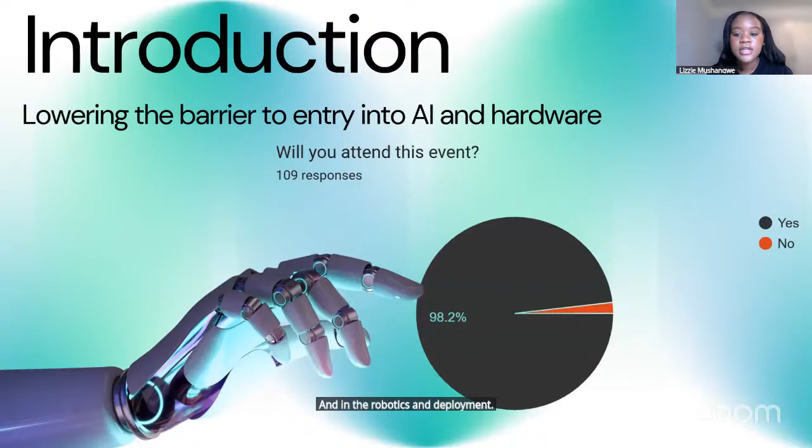So AI today is very software heavy, largely driven by benchmarking, improving metrics, and then publishing results. What's missing is that deployment intuition. In robotics and deployment, that's where friction appears immediately.

So the lab is an intersection of communities. We have OXRAM, which is Oxford Robotics and Additive Manufacturing Society, and OXAI, which is what I work with. And the first lesson we learned was to collaborate and share knowledge.

We have students who are strong in 3D printing and additive manufacturing, and we heavily drew from OXRAM's experience just to initially get running. So if you're a beginner, definitely lean into networks that already exist. OXRAM really helped us with prototyping and 3D printing, and OXAI is very software heavy.

We were strong in terms of machine learning, neural networks, and training models. So it was kind of an intellectual transfer between the two societies, and this enabled us to expedite the work we were doing.

A lot of the public asks, what is embodied AI? I think it's great to start on a level playing field. A lot of public conversations around robotics focus on humanoids or general intelligence, but that's not where the most successful systems are today.

In my opinion, the systems that work best are constrained systems - arms that work on smaller tasks, arms doing surgery, robotic dogs working in nuclear or defense areas, and drones. Mobile robots operating in structured environments aren't just what we focus on in the hardware lab, but this is what grabs everyone's attention when they think of robotics.

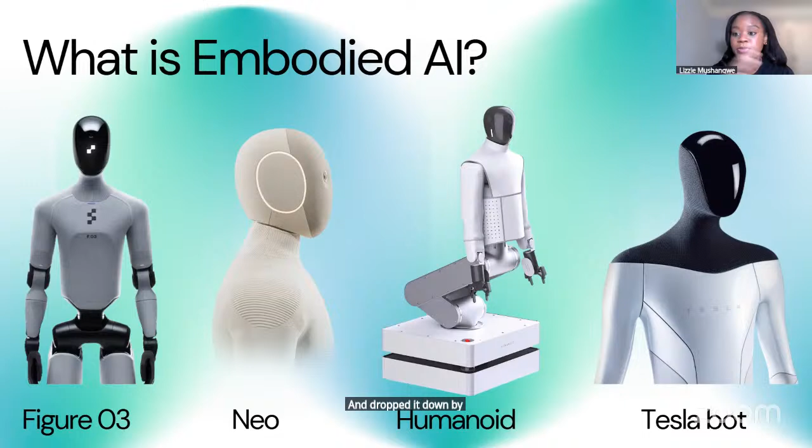Our hello world, what we called it, was to have a robot that picked something up and dropped it down by itself. From there, we could springboard into something more interesting.

To achieve this, we relied heavily on open source infrastructure, particularly LeRobot. I'm not sure if you've heard about it, but it's an open source GitHub and Hugging Face repo where you can assemble, plug and play, and build a robot by yourself - it's like adult Lego. This was lesson 3 we learned, and it was the inflection point or catalyst that helped us really expedite our progress. The key advantage was the pipeline was streamlined, and the GitHub repo just enabled us to get it running.

So all of our decisions were made to force everyone through the full loop - everyone learned how to assemble, calibrate, collect data, train, deploy, and debug. Once you go through this loop, your understanding of AI shifts - you realize many model problems are more physical problems, and many data issues are just calibration issues. This requires a lot of iterating and going back and forth. Once you go through this loop, your perspective of the difficulty of AI changes - this is what lowered our barrier to entry, just by going through this iteration procedure.

One of the most encouraging outcomes was how quickly students progressed. Over roughly 8 weeks, spread across 2 Oxford terms, students went from zero experience to assembling robotic arms, calibrating motors, collecting data, and training simple policies. It was heartening to see. The goal wasn't production-ready robots, but ingraining capability and know-how from beginner experience, getting to a stage where you could say, I know how to build a robot, I know how to train a model. Capability will scale faster than hype.

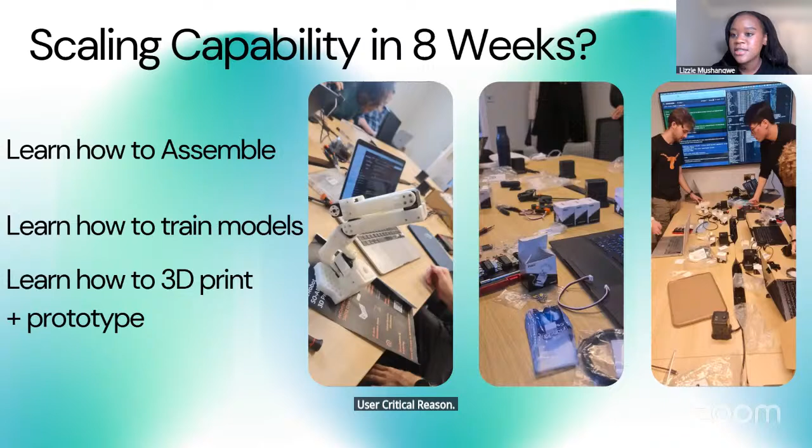Once people understand these constraints, they can learn what's realistic. We're having debates about whether humanoid robotics will even be integrated into society. Where is the role of a fully formed humanoid? Maybe we just need an arm or a head or some specific part of a robot used in society. It's good to see these conversations happening, with students using critical reasoning to ask whether we actually need a human representation walking around in the world.

We're not stopping at this first successful demo. We're trying to complete the loop, and having assembled the arm, we want to move on to other systems. Some students want to move from small-scale teaching the robot to play chess, while more ambitious students want to build a wet lab with an automated robotic arm that can do biology. I'm interested in high-throughput material science, so I'd love to make an appendage to enable high-throughput manufacturing. We're at a scale now where everyone's leveled up - we're all beginners, we've demystified the hype, learned the basic skills to build these robots, and we're branching off into something world-impactful, changing, and scalable.

I'm not sure if that was 10 minutes or 15 minutes, but that's me. That was great. Only 5, it was great. 15, all good, all good. But yeah, if I was to summarize from our experience...

To lower the barrier to entry, definitely start constrained - you don't need to do a full embodied human. We chose an arm, which drastically lowered our entry into this. Use open source - I highly recommend tools with a fully outlined pipeline on how to assemble a robot, train the policy, and iterate, then you quickly go from beginner to advanced. Collaborate across disciplines - OXRAM really helped us move from basic PLA plastic manufacturing to building more metal arms that can handle higher loads. Force yourself through the entire loop to learn everything, and embodied AI becomes less intimidating once you've experienced the full loop. From there, much more interesting things become possible.

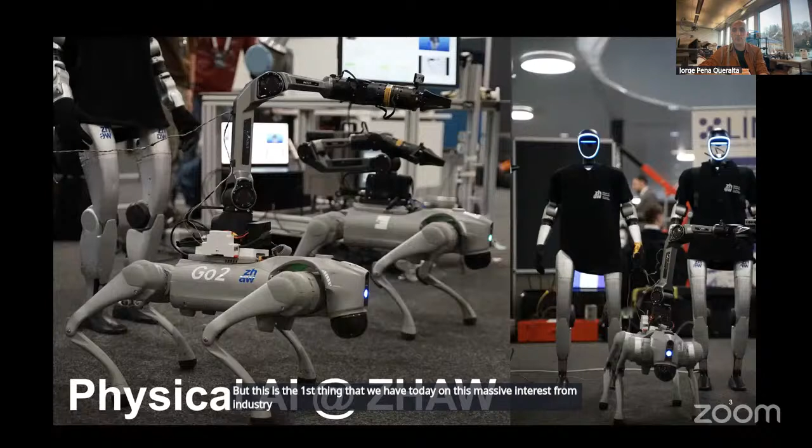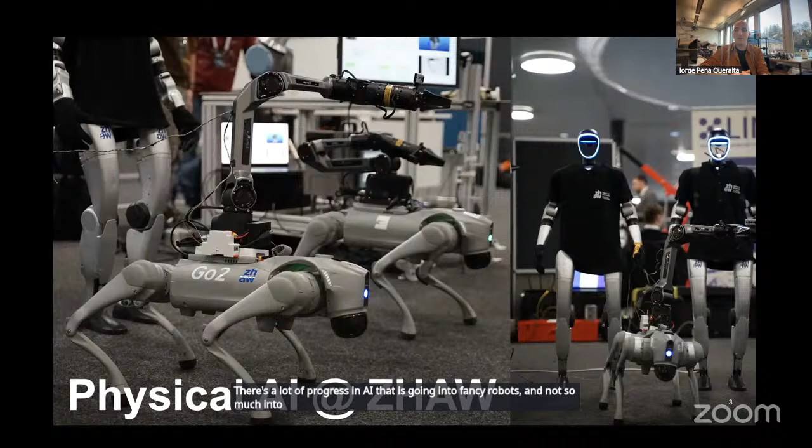There's massive interest from industry in trying all of these platforms. But I'm also very interested in bringing this new wave of AI into assistive robotics, working with companies that make intelligent wheelchairs, adding robot arms to let people interact with them easier. I feel there's a lot of progress in AI going into fancy robots and not so much into actual useful use cases. So even though this picture shows these fancy robots, that's not the entirety of my focus.

Given that intro, delving directly into the topic: Jensen Huang said last month in Las Vegas, a bit more than a month ago, that the ChatGPT moment for robotics is already here. So many people have been saying it's around the corner any moment now. While I agree there's been unprecedented progress in the field in the last few years, I have to mostly disagree with this statement.

For me personally, what the ChatGPT moment meant for AI in general is mainly two things. One, that AI became accessible to anyone. And this is actually changing in robotics, as Lizzie said, with projects like LeRobot, so hardware is really becoming accessible. But with ChatGPT, anyone could take a general AI model and ask it to do anything. So we had a model that could do anything for anyone.

I don't think that's true with robots. If you take the most advanced humanoid robot or any robotic platform today, whether Chinese, American, or European, and put it into a new factory floor and ask it to do anything, if you're lucky, you can ask it to step forward or dance. But if you ask it to pick up a new object in a new environment where it hasn't been before, it probably can do zero. So I don't think we're there yet with this ChatGPT moment in robotics.

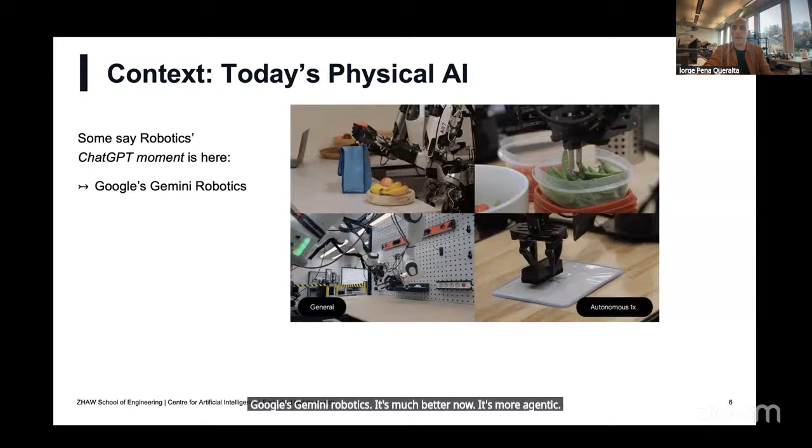To give context of what we've seen, these are videos from the last year, and the progress has been unprecedented. This is already nearly a year ago, Google's Gemini Robotics. It's much better now, more agentic, now a multi-layer AI model. But in terms of manipulation capabilities, yes, we can do impressive things.

This is also from last summer. Figure has shifted to home robots, and you've probably seen a video from a few weeks ago where it unloads a dishwasher. So we have unprecedented capabilities in manipulation and also loco-manipulation with, for example, humanoid robots or robot arms.

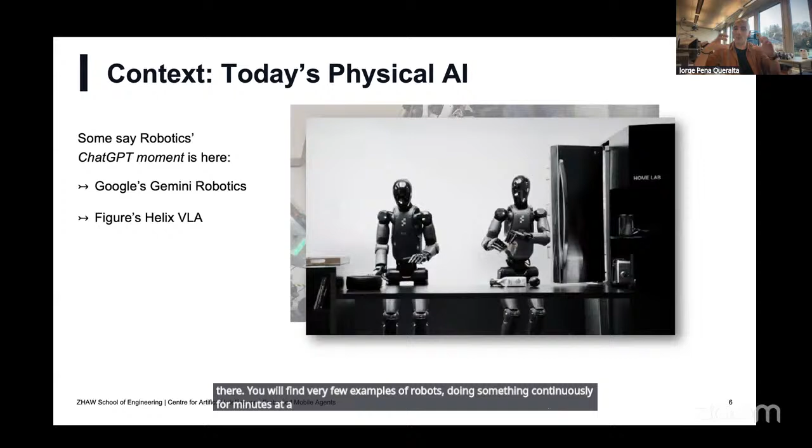Everyone is pushing in this direction. NVIDIA is putting a lot of work, for example, on being able to learn in simulation. But a common aspect of these three examples, and I'll emphasize this, is that these tasks are short in time. There are very few videos out there showing robots doing something continuously for minutes at a time, or tasks that require planning for more than 5 to 10 seconds.

The second thing, which I'll build on in a moment, is that these robots are not moving too much. And the last thing, as Lizzie was saying, is there's a data problem in the sense that these three examples are trained mainly from human demonstrations. There's a lot of work being done to leverage more data, but today the majority of this is done by teleoperation.

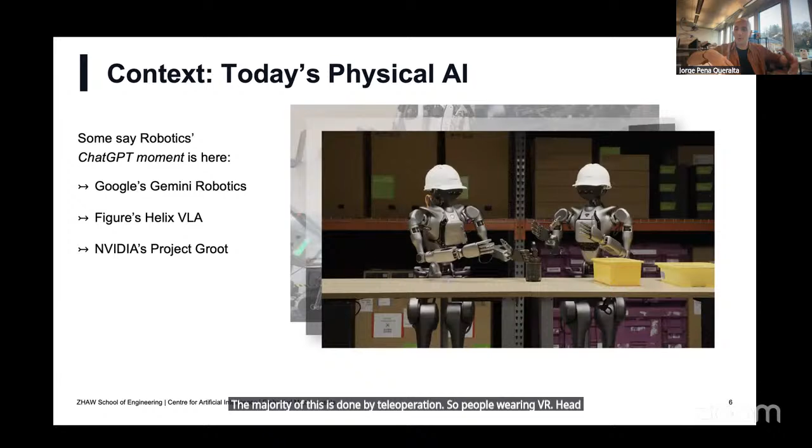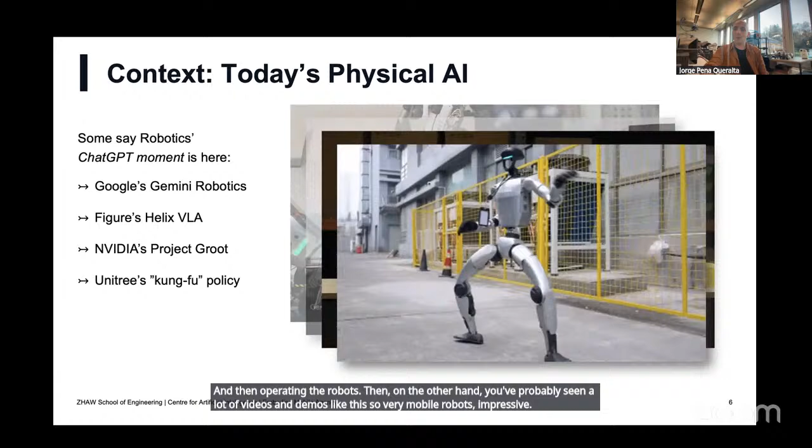So people wearing VR headsets, gloves, or suits, and then operating the robots. On the other hand, you've probably seen a lot of videos and demos like this: very mobile robots with impressive, even superhuman physical capabilities, whether it's Kung Fu with a humanoid, a robot dog doing parkour and acrobatics, and even teaching robots to show emotion or emotiveness. I like to show this example from Disney because it really contrasts with what we typically see from other companies, while it's still the same type of methods.

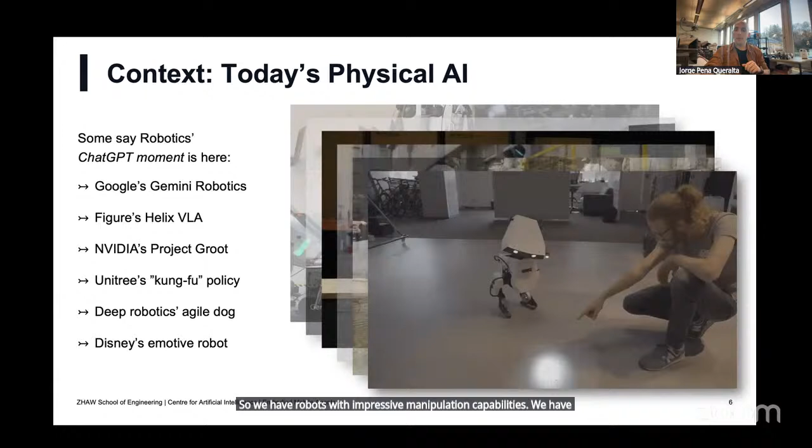So we have robots with impressive manipulation capabilities, and we have super agile and mobile robots. Now, the first problem is that these two sources of capabilities for robots come from two different fundamental methods in AI and robotics. The first three examples I showed are basically what we call foundation models in robotics, something like ChatGPT, and today this is largely learned from human demonstrations. So they're limited by the amount of data and the type of data we can generate. I'll build more on that in a moment.

And then we can do all this fancy stuff, which we do mostly in simulators, where you can teach a robot to do almost anything its hardware allows, whether it's Kung Fu, parkour, or showing and transmitting emotion. But this is something we do with simulators, and this means that these three robots, the Kung Fu, the dog, and even Disney's robots, are not aware of their environment when they're deployed in the real world.

They don't really have obstacle avoidance. If you put a little kid, anyone, or any object in front of one of these robots and activate this Kung Fu policy, they won't see them, they won't stop, and they will basically crash.

So we have two fundamentally different ways of training robots today. And again, there is a lot of research on merging these and leveraging both. But today, in terms of real world deployment, applications, and use cases in industry, we have these two fundamental differences. So taking this into account, why are robots not there yet?

I will just shine light on a couple of aspects. This is not exhaustive, but a couple of examples of why robots are not there yet. The first one is what I'll call the human-in-the-loop limitation, taking a bit of flexibility in the use of the term.

For many years, at least from an academic perspective, when you talked about human-in-the-loop robotics, this was a good thing, in the sense that it wasn't just a robot performing by itself, but you could keep oversight, introduce human preferences, or have a human in the loop in the learning process. So this was a good thing.

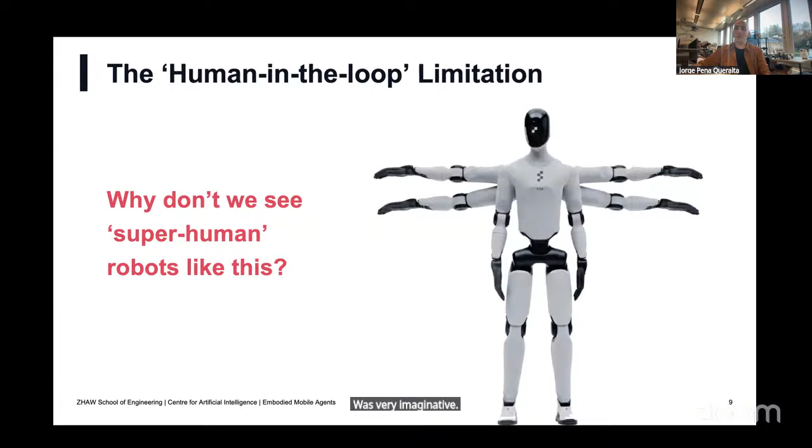I would say that today the human is the limiting factor. So why don't we see this? Gemini took a bit of imagination, adding extra arms to the robot, but why don't we see robots with four arms or six arms? The main reason, in my opinion, is that we don't know how to teach them yet.

But most of these robots have so many motors in their arms that they could just place the hand on top of the bottle and screw the lid within half a second. Now, they don't do this because we teach them from human demonstrations, and humans cannot do this. We could teach them in a simulator, but then we would need to build a purpose-built simulator with many different types of bottles and environments, where we could use reinforcement learning to teach them how to more efficiently unscrew bottles.

So we are really limited by how we teach robots. The hardware can do so much more, not just in terms of doing Kung Fu, parkour, and fancy acrobatics, but also in terms of manipulation, but we are not able to exploit it because we don't have the way to teach them.

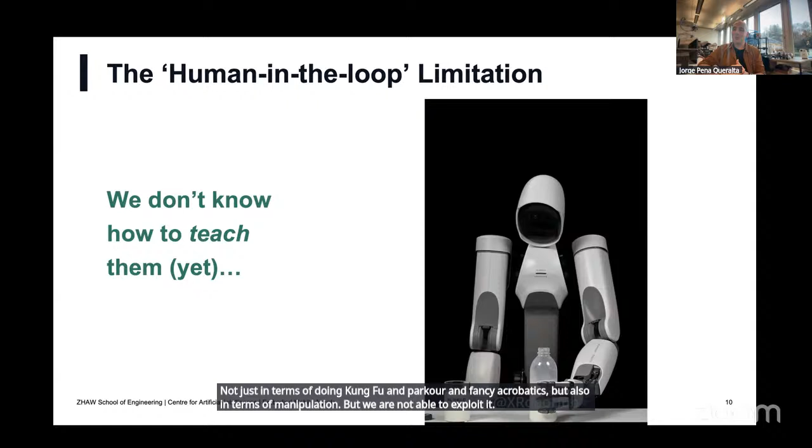Then there's also what I'd call the scaling gap. We've had pilots for more than two years already, or at least the last couple of years. This is from July 2024, when Figure announced their first collaboration with BMW. You can see from the previous video to this one that the robot has changed significantly. So this was really like a prototype, but this was really a pilot project.

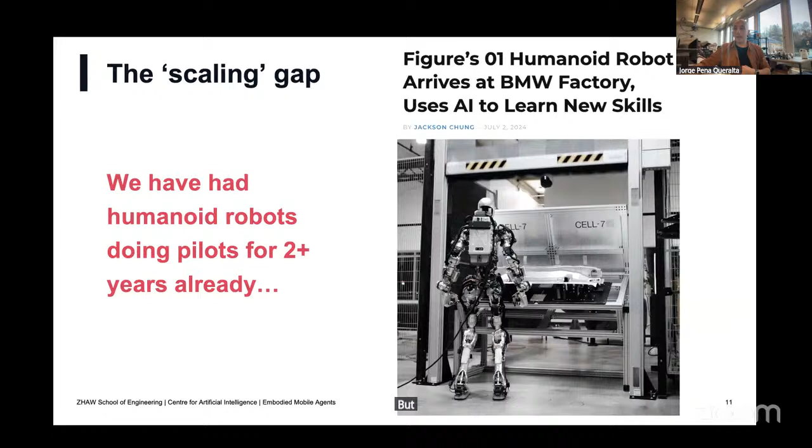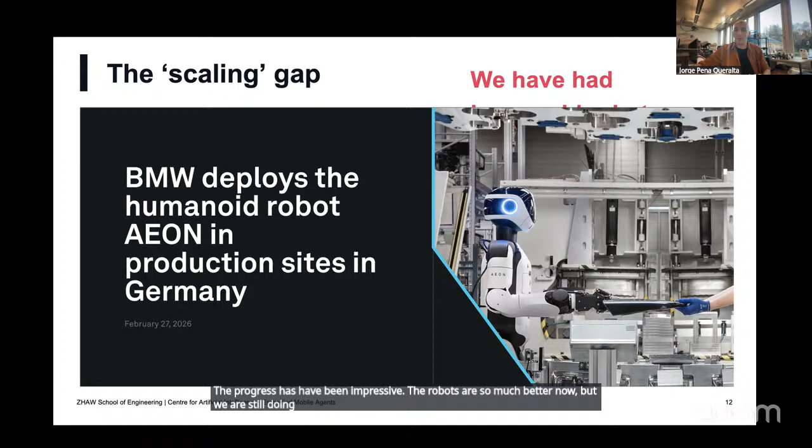And we have another announcement from just a couple of days ago, or last week, from BMW again. Now they are working with Hexagon here in Germany and Switzerland, and they are doing once again a pilot. So the progress has been impressive, the robots are so much better now, but we are still doing pilots. So why aren't we there yet? One of the things is this scaling gap—basically how to actually reach the level of robustness and reliability that we need, for example, in industrial use cases.

And this is a bit of what they call the demo illusion. This is not just something that people who are not experts in robotics get fooled by—I recognize that I've been fooled by demos many times, and when I talk to my colleagues, many of them as well.

If you showed me this just a year ago, or especially two years ago, I wouldn't believe that this is possible in such a short time. So I don't want to take any credit away from this.

But when we see these videos, we should also critically analyze a few things in terms of real-world use cases. What are the success rates? Very often with these demos, success rates is anything from 30 to 70%. Now, you cannot have a robot in industry that fails half of the time. You cannot have 100 or 1,000 robots doing something, and then half of them are failing half of the time. Then you need more people than robots to keep up with fixing what they are doing wrong.

But beyond the success rate, what is the robustness of these AI models that we are learning? How much can you change the box? Does it still work? This touches a bit on the fragility of the models and the data that we collect. How much can you change the scene? Can you change the color of the shelf?

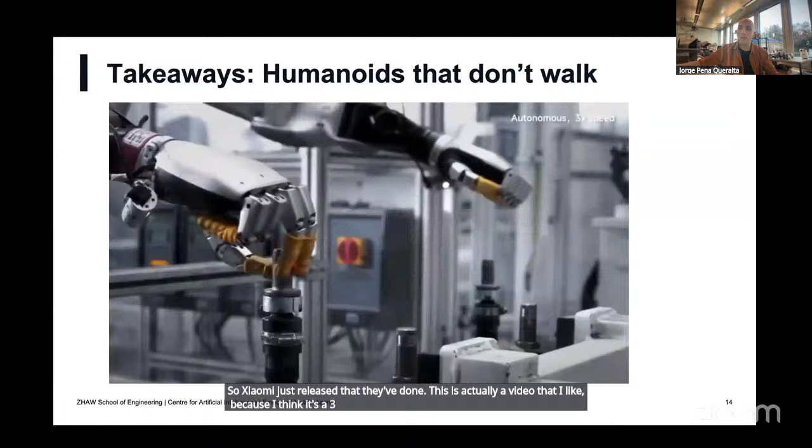Xiaomi has these humanoid robots basically putting in screws, and they achieved quite a high success rate. I don't recall now, but I think it was 90%, quite high.

Now, this is the other thing, touching on the problem of whether we need humanoids or not. Most of the demos involving humanoids, the humanoids don't walk, and these are legged humanoids, so it's not even on a mobile base. They actually have legs. Now, this is an example of the state of the art today. So really, robots in a factory is still achieving something like 90%, which I would claim is not really scalable — you cannot put this into thousands of robots that fail 1 out of 10 iterations.

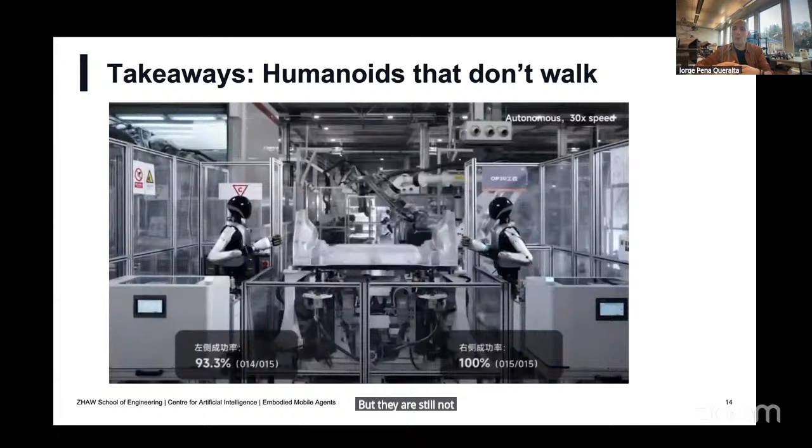But they are still not moving. So when we introduce movement, the amount of data that we need, the complexity of the task, the amount of diversity that we need of the data — this increases significantly.

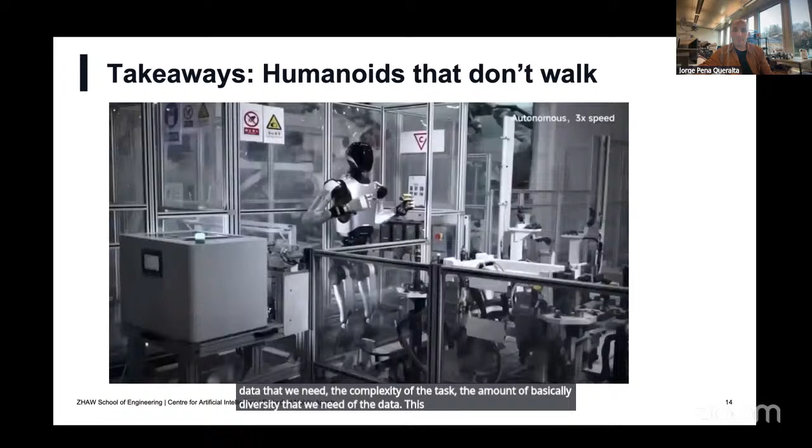So I would say that this is another takeaway, or thing to take into account when watching these demos: very often we have humanoid demos, and humanoids don't walk.

Now I'd like to close all these examples with what does it really take to have a robot in an industrial environment actually operating with robustness and reliability.

So Figure had this use case last summer. Just to put it into context, Figure is the startup in humanoid robotics that has raised the most money in the world, billions in funding by now. They probably have one of the best robots, if not the best, and one of the best AI models. They were already doing this pilot with BMW for a while, and then they switched to this second industrial use case.

I will show a video in a moment where the robot is supposed to pick up a package from one conveyor belt and then shift it to the other conveyor belt on the left side by checking which side the barcode is on. Then it puts it down and flattens it.

And they released it, I think it's an hours-long video where the robot basically fails less than a human. So it's really, really reliable.

But Figure already had the robot, already had the AI model, already had all the data acquisition and training pipelines, all the infrastructure required to teach this robot. It already basically had everything - it just needed to teach it one more skill.

So how much did this take? What did this take? Well, it took them one month. It took them 500 hours basically of teleoperated data they had to record, which then had to be curated, and then the model trained. So probably $300,000, $500,000, maybe more than $1 million in cost just to teach the robot this one skill.

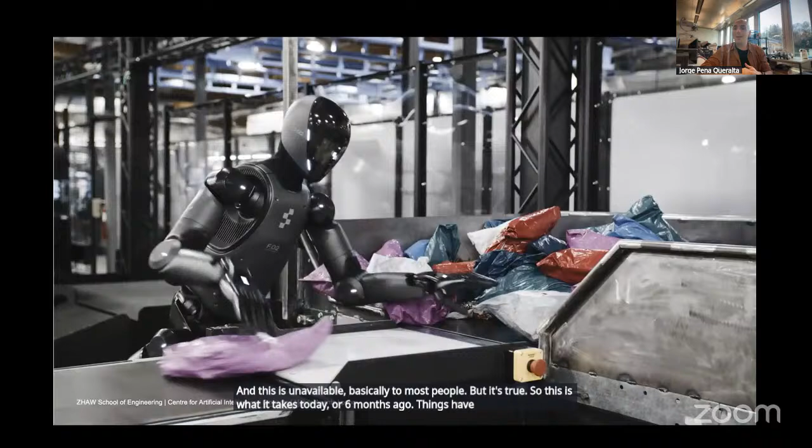But it's true - this is what it takes today, or took 6 months ago. Things have improved for sure, but this is what it would take 6 months ago to get a robot to do something like this reliably, with a 99.9% success rate and robustness. And you can see what the complexity of the task is.

So you could ask yourself: are companies willing to pay $1 million in advance to teach a robot one skill like this, where the robot isn't even moving? It raises the question - do you need the legs?

I'd say I'm not totally negative about that. It's true that if we really mass produce humanoid robots as a general platform, eventually they would become very cheap. So even if it doesn't move, it might be cheaper to have a legged humanoid than a purpose-built robot. But still, at least today, this raises some questions.

I'll try to close very quickly because I'm over time. My takeaway from this presentation would be that today the physical AI and robotics landscape is fragmented. There's a lot of research on combining these things, on improving things, on learning from less data, on learning from someone who just wears a GoPro in a helmet so you don't need to teleoperate a robot - but it's not there yet in terms of use cases.

So the need for human data, the need for teleoperation data, and the fragmentation of this landscape - basically the things we have, reinforcement learning algorithms that teach mobility, and human demonstrations that teach manipulation - how to combine these two, we don't have best practices and a good solution for now.

And I'd like to close with what we are doing. We are spinning off, as Mike said, a company from the Zurich University of Applied Sciences called Binabik, and we are working at the intersection of physical AI and agentic AI. As much as I disagreed earlier with Jensen Huang, I'd like to borrow this one slide from him that I like and that he's used for many years now.

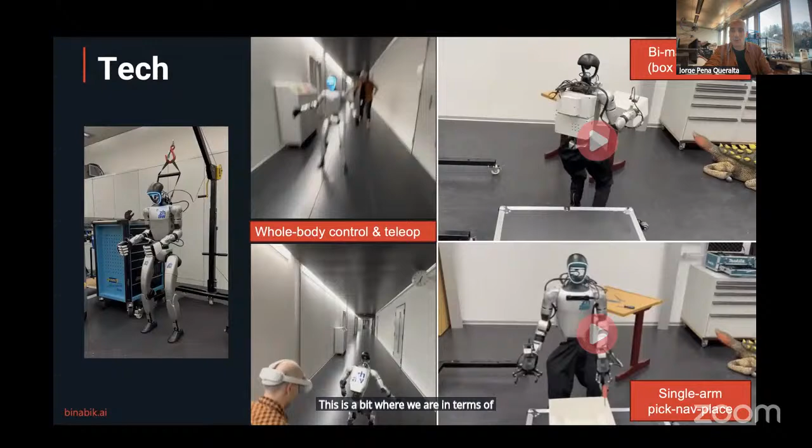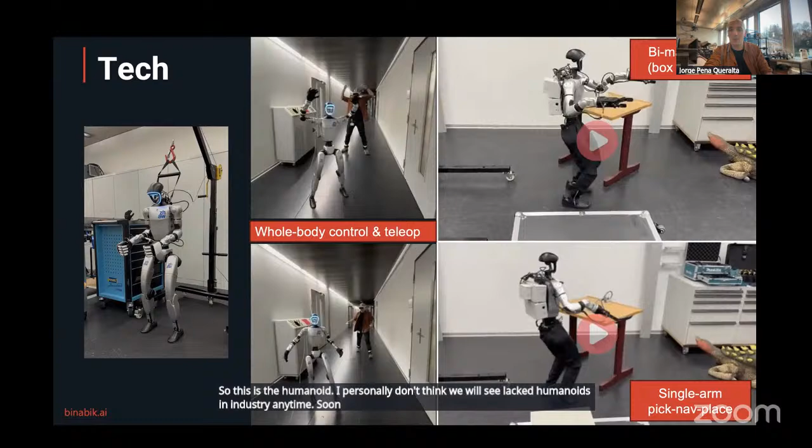This is a bit where we are in terms of, so we are doing some pilots with a company also from the university side. So this is the humanoid. I personally don't think we will see legged humanoids in industry anytime soon, so it will probably be humanoids on wheels. But yeah, this is a bit where we are today.